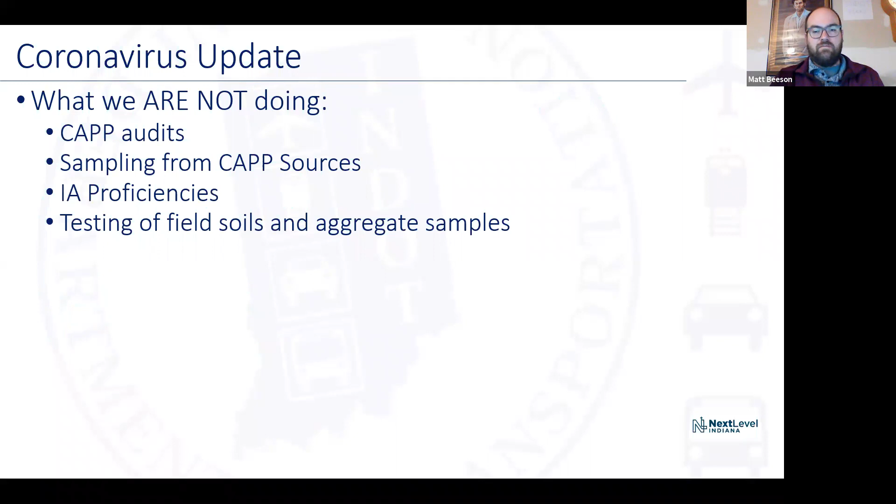That being said, we will be testing critical samples that need to get tested. We don't want to hold up any construction projects, and we also don't want to waive testing where there would be a risk of obtaining substandard material on a contract. So we are going to continue to test critical samples.

The freezers at OMM are continuing to run. We're having personnel come in and operate those as needed, so we can get that information out to people that are waiting on it, and so we don't get behind. These restrictions are until May 1st as of right now.

We'll be reviewing that as we go through April. We will consider exceptions, so if there's something that really needs to happen, we'll handle it on a case-by-case basis. We want to make sure we're still getting quality materials and have qualified personnel during sampling and testing. So if IA does need to go out and somebody is brand new, that could happen.

We'll review, but we also want to ask everyone, if at all possible, to find someone who's already qualified that can do the work. We're going to make every effort to postpone and defer per the governor's recommendations and CDC guidance to socially distance ourselves from each other. But we're still going to support our suppliers and contractors, so we may need to sample and test on a case-by-case basis.

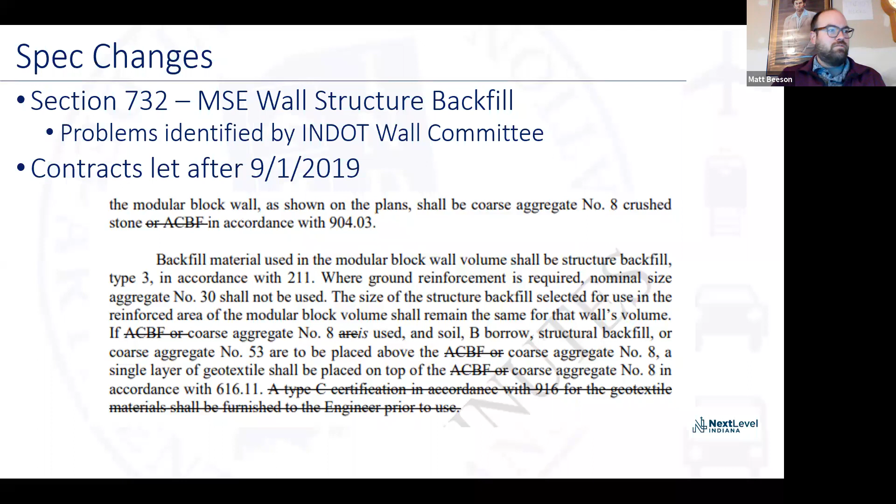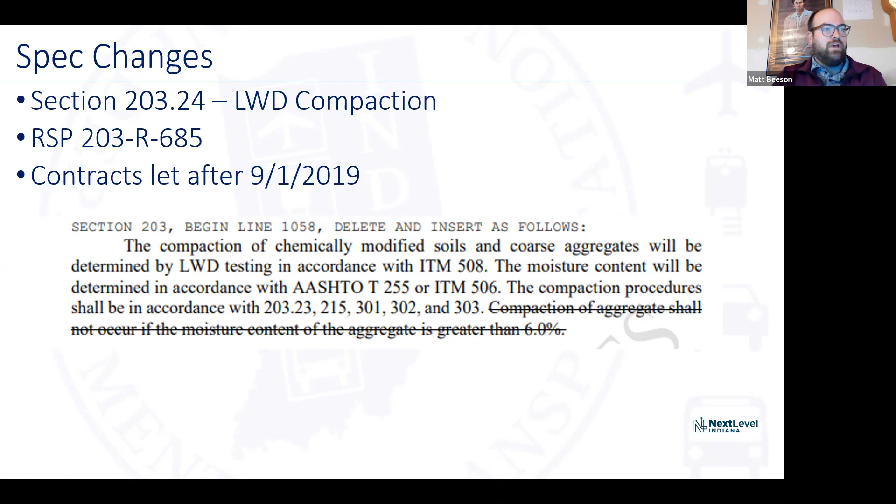We had a clarification on friction aggregates, and this came up for HMA surface mixtures. There used to be a table a few years ago; we put it into a few paragraphs instead. Reading there: ESAL Category 4 type D-surface mixtures, high friction aggregates including slag, ACBF slag, steel furnace slag, sandstone, or aggregates in accordance with 221 shall be used.

Going down the screen, we allow up to 50% by volume crushed dolomite or polish resistant aggregate, and then we also allow up to 20% of any crushed stone or gravel to be blended in there. The intent was it would be 50% high friction aggregate, and if you wanted to use the crushed stone or gravel, that would cut into the other 50% of dolomite or polish resistant aggregate.

It wasn't read by everybody that way, and I believe we had an HMA producer submitting mix designs with 30% high friction aggregate and 70% of the other stuff, and that was not the intent. So we added the phrase 'and at a minimum shall comprise 50% by volume of the coarse aggregate.' That's going into effect for contracts let at the beginning of this month.

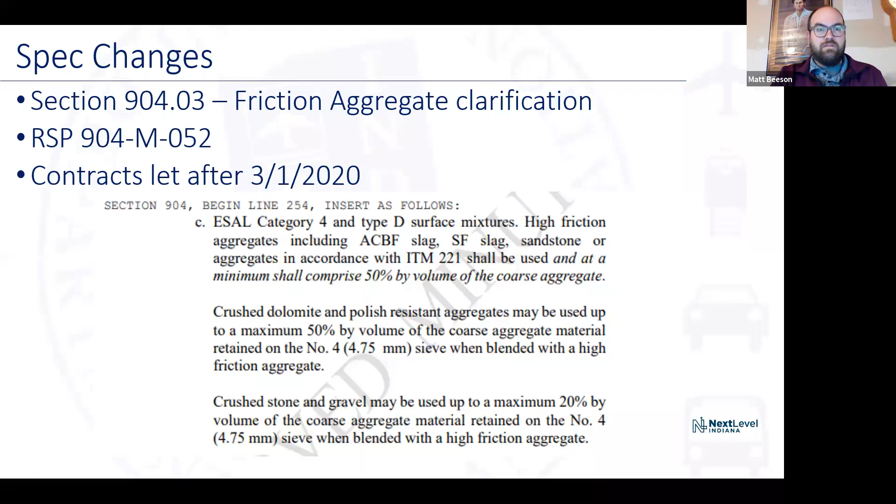All right, we made numerous changes to our blast furnace slag leachate determination. I know for most of you on the call this doesn't affect you, but I wanted to point it out. We're working on ways to minimize leachate, and there's an ongoing research study looking at an improved test method to more closely mimic what happens in the field.

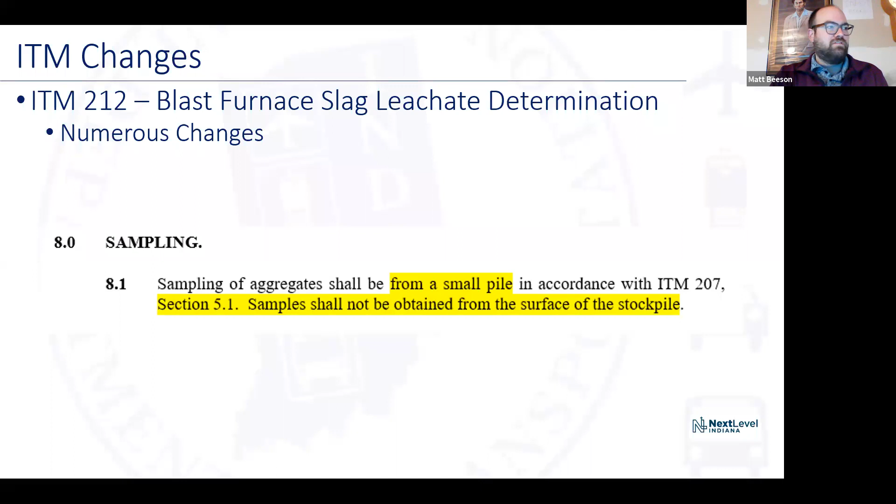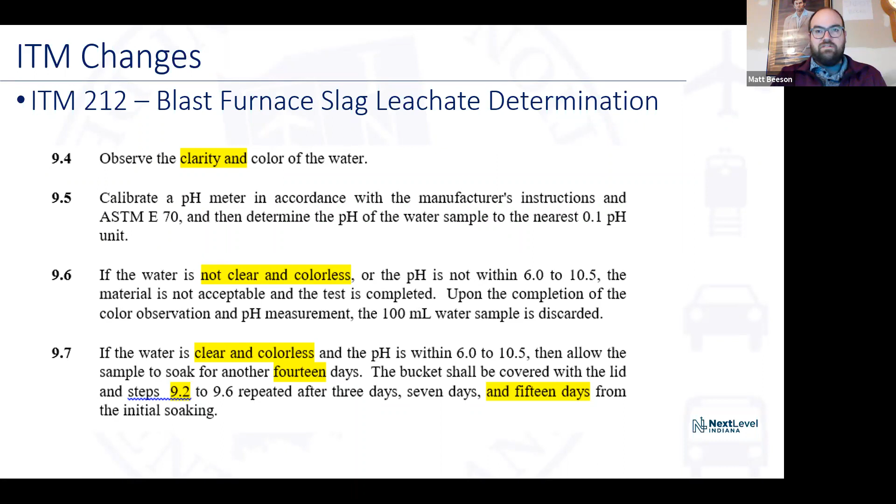But these are the changes we made last year based on what we've learned so far. We want to make sure we do not get samples from just the surface, we want interior samples. We used to allow up to a certain color based on a color scale of water after the test, as well as pH testing. We decided to change that so the water needs to be clear and colorless, and we extended the test to a total of 15 days rather than ending at 7 days.

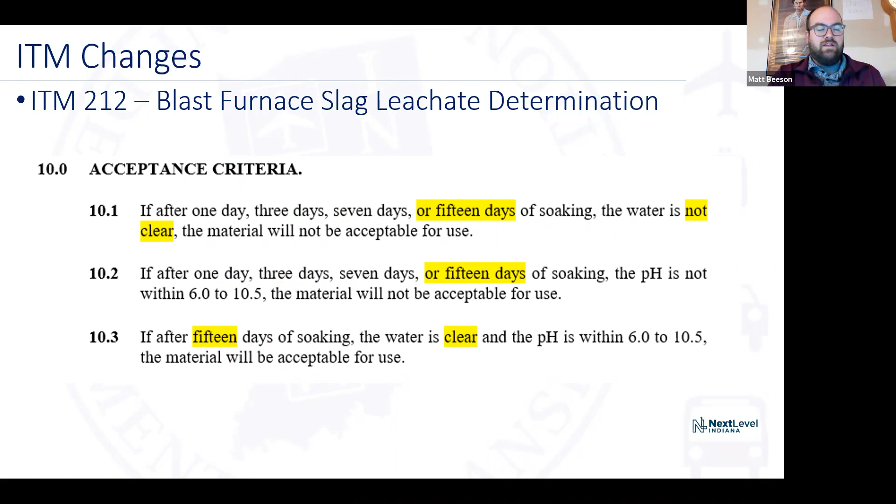So those were a few changes we made to attempt to improve and not get any leachate when we use blast furnace slag in an unbound condition.

Okay, this is one recent change that just happened last month. There's been a few industry members asking when INDOT is going to implement the use of the so-called go, no-go gauge for verifying sieves. Up until now, we've only allowed calipers. I think as a department we're still reviewing whether we want to do that for our own usage, but we do understand for your usage it can be beneficial, faster, et cetera.

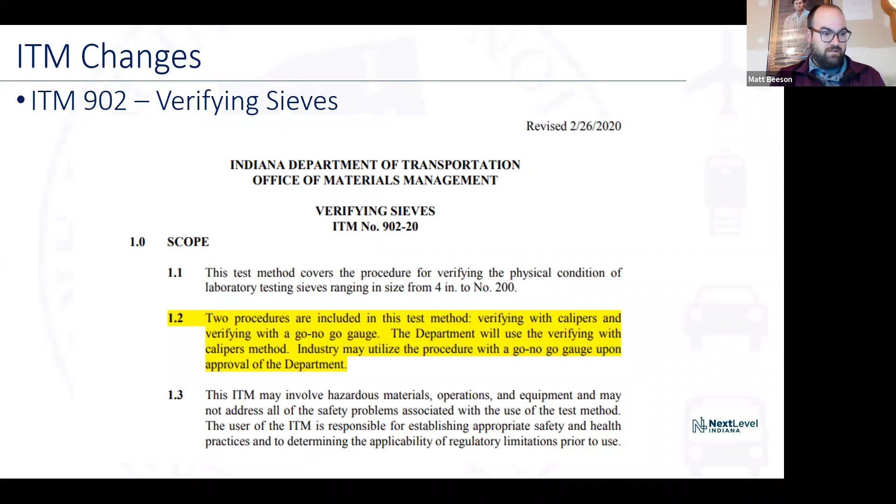And so ITM 902 now has an option. In the interest of not ballooning a procedure and not tying you down to one procedure that we would write, especially because this is not necessarily recognized by AASHTO yet either...

We decided to do it this way: if an industry member would like to use a go, no-go gauge for checking sieves, they need to develop a method and put it in their quality control plan, and we will review and approve that method. So more or less, you need to make your own in-house method for how you're going to do that. It doesn't have to be extremely formal, it just needs to be a method you can follow across all the sieves you're checking, and we will take a look at that and review it. So that's the change in effect right now for ITM 902.

Okay, so we did get some new freezers. I mentioned the freezers earlier are running, which is great, because with the old freezers you never knew whether they were running or not at any given time, since we had so many maintenance issues with them. So about 3 or 4 years ago, we added up all the costs we were incurring to keep the Punzac freezers running, which were about 25 years old, or maybe even a little older. We were spending, over the course of a few years, about $80,000, I believe, just keeping both of them running.

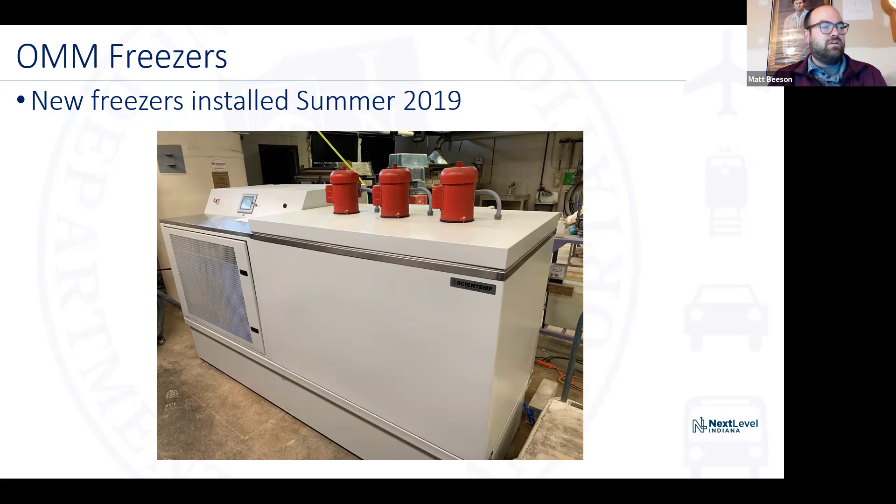They're operational. We've been doing some comparisons with the concrete AP freezer. We're still compiling a lot of information. The concrete freezer, as far as I know, the Punzac is still technically operational, although we're phasing down with that. But we do have some good comparisons between the old and new freezer for the AP that we can compile and share at a future technical committee meeting.

Okay, so the future. A few things I want to talk about going forward. I really want to improve this friction aggregate acceptance process. It still stands today where we need to do a test strip for both our PRA, ITM 214, and high friction aggregate test products that get approved. That's a big investment of resources, both in money and in time, at least a couple years from start to finish. That's not the most efficient way to do things.

We're fairly confident that we can move to use the procedure that's used in ITM 221, the polishing wheel procedure, to validate this, but we do need to do a final round of research to follow up on some of our earliest test sections placed out there to make sure that we have good correlation.

One other thing we did not do with the last round of research was, it was tough when we put the request out there, to find people making asphalt mix designs with aggregates that polish, because we don't allow it per our specs. So we really need to test some mixes that have polishing aggregates to make sure we're able to discern between highly polishing and polish-resistant aggregates.

So that will be coming. I'm going to cross my fingers that research will get funded this go around. It's just below the cut line, but hopefully we can get that moving so we can move on with this process.

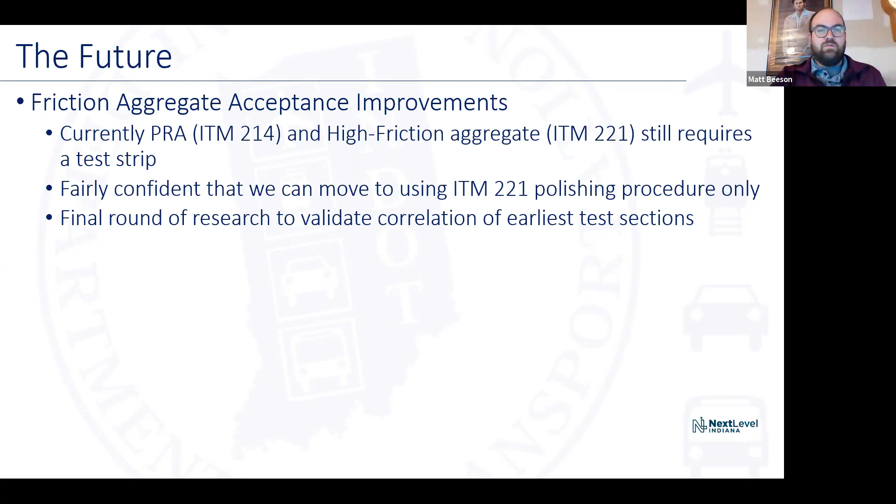Okay, so one other, and this is probably the biggie that's been discussed a lot in various circles on the aggregate side, really everybody. We had a meeting back in December with the aggregate industry, the concrete industry, the asphalt industry, and INDOT all in the same room, which doesn't happen very often, talking about what we want to do with optimized concrete aggregate.

So we're trying to improve concrete performance. You've heard it called the tarantula curve. It's the same thing, we're trying to optimize the aggregate. So this is a picture of it. Concrete people tend to talk in percent retained. I know we're used to percent passing, but it's essentially each sieve and each percent retained. The concept is if you can get a gradation for a concrete that plots in that curve you see there, then you will get some really good outcomes.

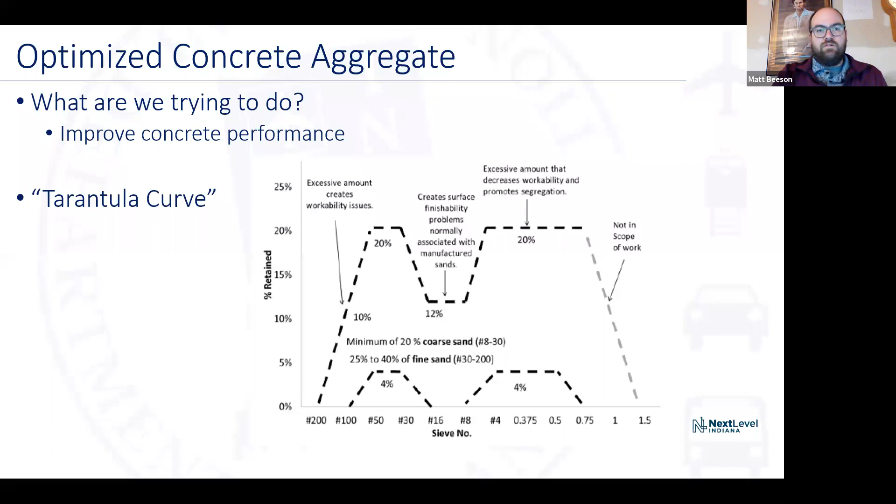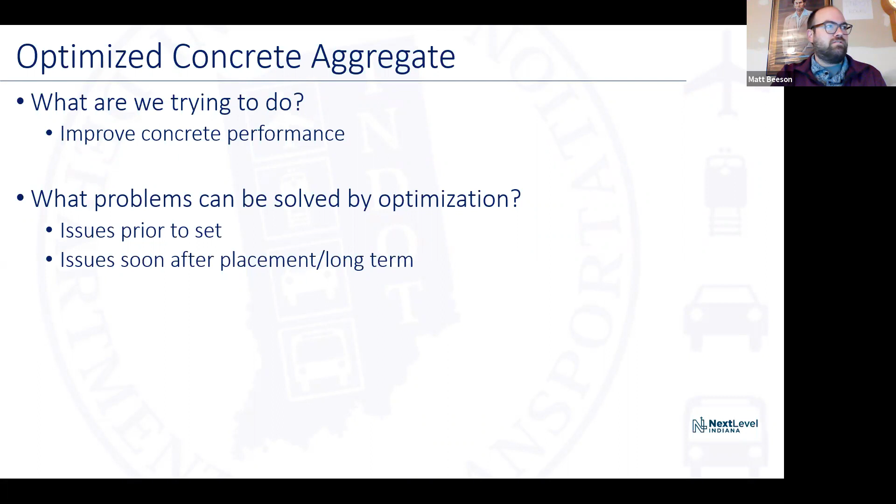So I'll talk about a few of those. What can we solve by optimization, issues prior to set as well as long term? There's a lot of good things that can come from meeting that tarantula curve for your concrete aggregate gradation. It makes it easier to finish, so the finishers aren't having to do crazy things.

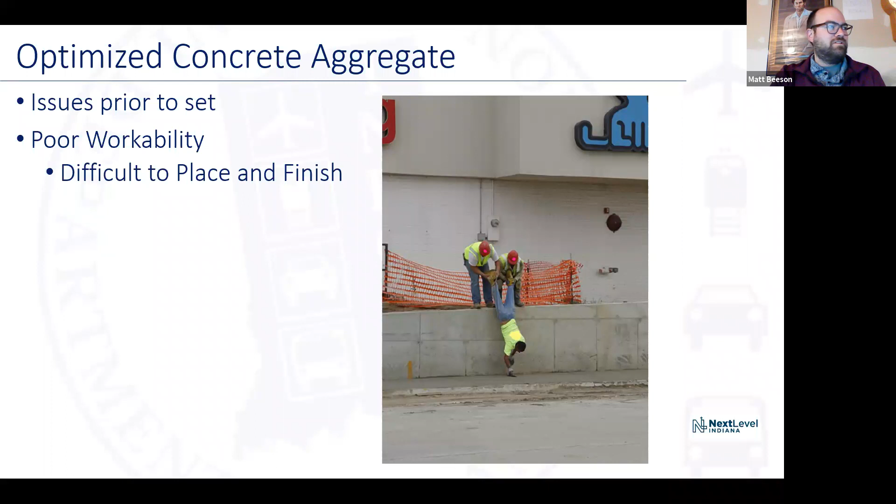I love that picture, I stole that from Mike Nelson. That's a great one. I guess finishers will go the extra mile, apparently, but we want to make their job easier, because that gives us more durable concrete in the long run.

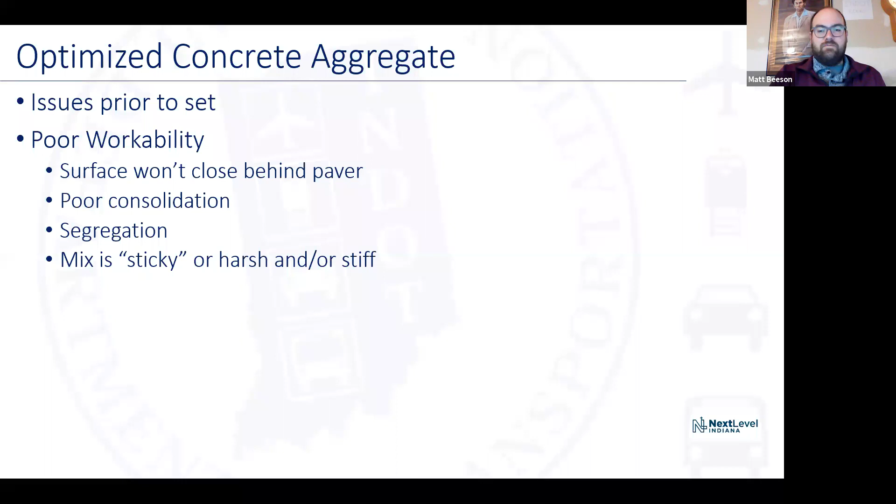It met our specifications as of the time this was placed, as far as the gradation, I should say, but it was not optimized. We feel like if it had been an optimized gradation, it would have prevented it.

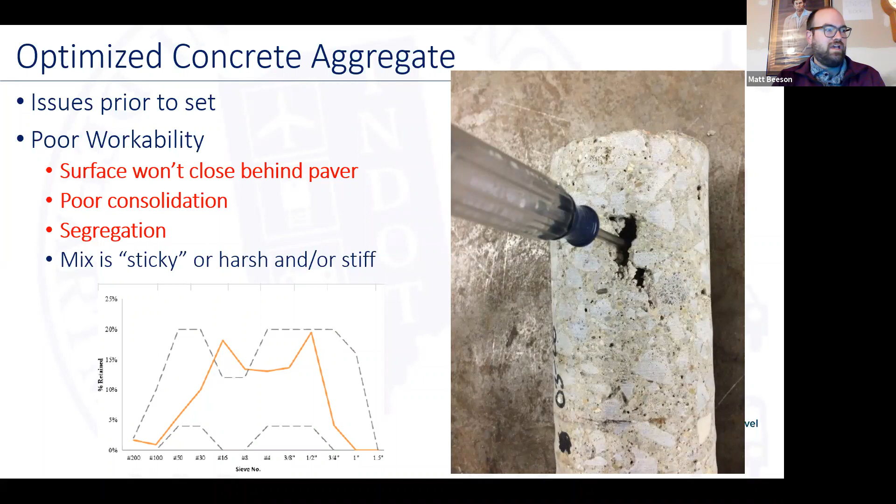This is another example, a barrier wall. You can see a crack that occurred there, consolidation around the rebar, and the mix was just too harsh and ended up leading to that crack. This was a core we took to investigate that.

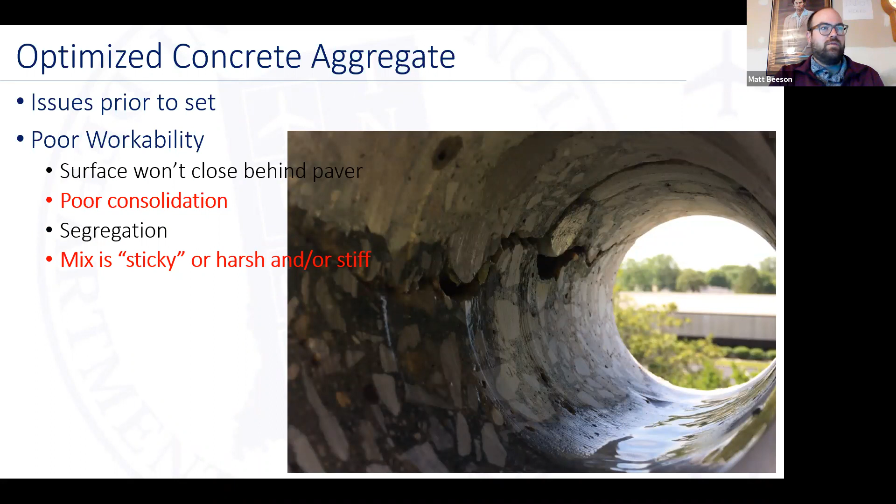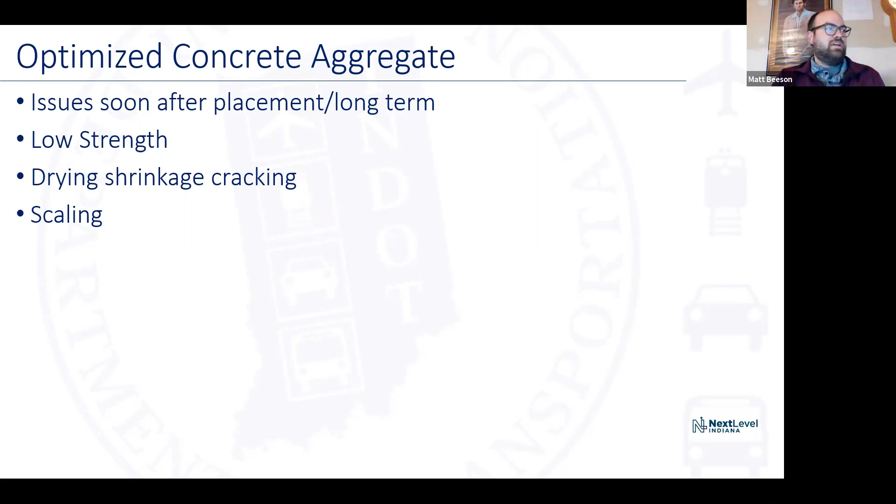It can also lead to shrinkage cracking on decks, and after placement, low strength, scaling, etc. So there's a lot of win-win things that can come from this. And I want to say, are we getting bad concrete? Well, no, not really, not across the board. There are some examples I showed of some issues, but we could be doing better, and we could be doing it for all of our concrete, both pavement and structural.

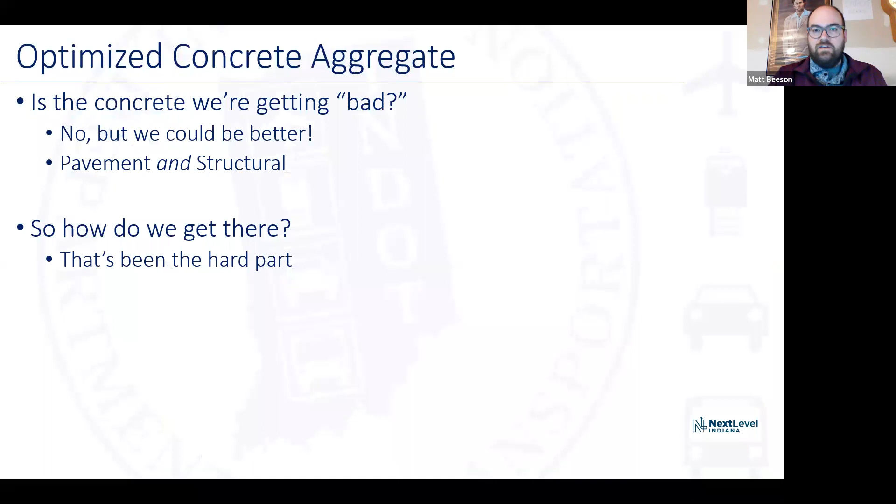But how do we get there? It's not been as easy as just flipping a switch or snapping our fingers. So about three years ago, we decided to put this out - and actually, I say all concrete pavement here, but it's actually for all concrete pavement and structural concrete.

We had a draft series of spec changes that would have just required this, and that kicked off much discussion. There were a lot of meetings that ensued out of this. We were quickly informed it was not going to be as easy as just changing a couple lines in a spec to say give us a tarantula gradation.

So how is industry, both the aggregate industry and the concrete industry, going to deliver this to us? It sounds like a minor change, but it ended up being a complex series of discussions as to what do we do.

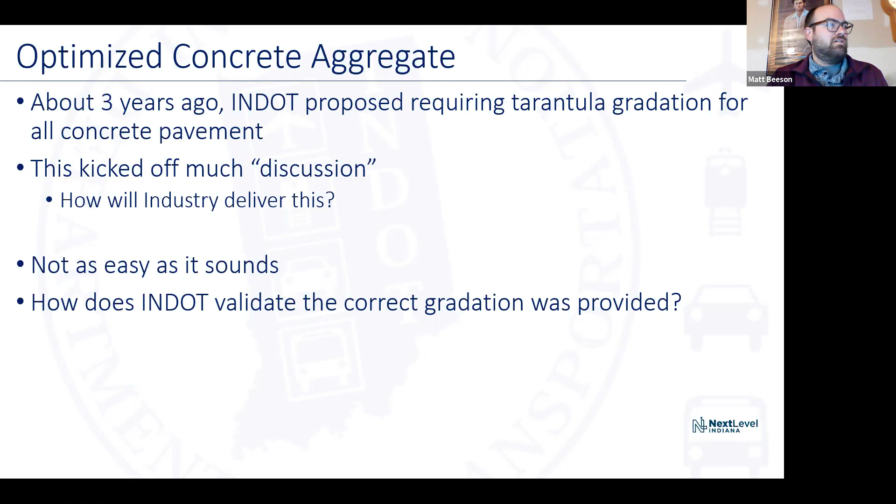I think a lot of people also said, well, that's a great idea, but the other industry or another industry can adjust for what INDOT would like to do. And so what do we do?

Last year we've been going along with this. We've actually done a trial project where one pavement contractor has worked with the aggregate supplier on a big job to do this. But as far as an across the board spec change, as of last year, we're still talking about it. And the question came up of the Indiana 8s.

It was brought up at a meeting with the ready mix industry: what are we doing? INDOT is specifying 8s, but why do we really want 8s? What I mean is our CAPP program says, hey, you aggregate suppliers, give us some 8s, and thumbs up, everything's good, we have no problems, you're doing a great job.

And then we are trying to turn around and tell the concrete suppliers that, hey, don't use those 8s, because those mixes aren't optimized. When you take a typical Indiana 8 gradation and blend it with our typical 23 sand that we have in this state, it does not give us a tarantula optimized aggregate.

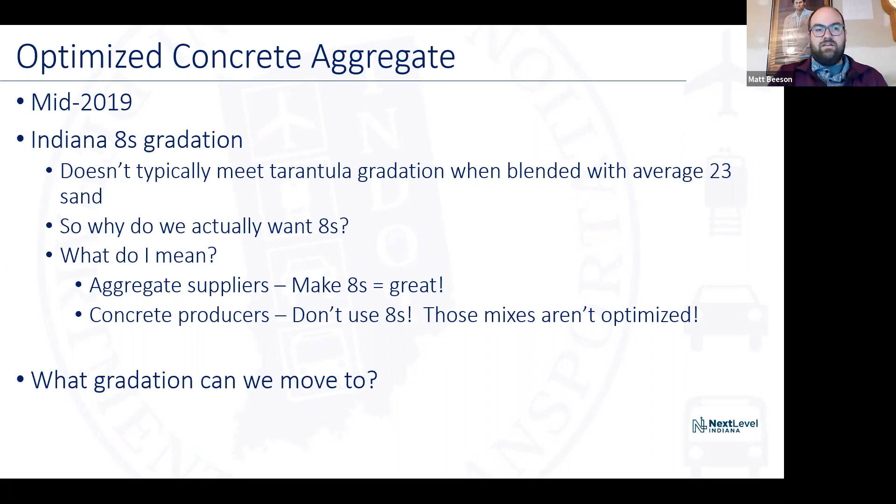So INDOT asked the question to the concrete industry: okay, if 8s is not it, what gradation do you want? And the concrete industry proposed a new gradation back in October, and submitted it to INDOT and IMAA. Numerous meetings and discussions ensued.

There's a lot of concern about the concept of replacing the 8s with this gradation, and a lot of concern about how to make that happen, whether that's even feasible or not. That led to that big meeting I referred to in December, which the asphalt industry was also involved in.

And I'd like to say they asked, hey, wait a minute, who moved my cheese? Because it would affect them also. So we had a lot of discussions as far as what we should do. Should we have a couple of different gradations? Do we choose this other gradation on our high risk jobs, et cetera?

That's kind of where we're at with that new gradation proposal. There's been an alternate option proposed, still in discussion stages, but one that could have some promise. Instead of a statewide standardized gradation that this shall be the new concrete aggregate, there's been discussion of a program similar to ITM 225 for drainage layer aggregate, where a source submits a QA gradation that would be reviewed, tested, and approved by INDOT.